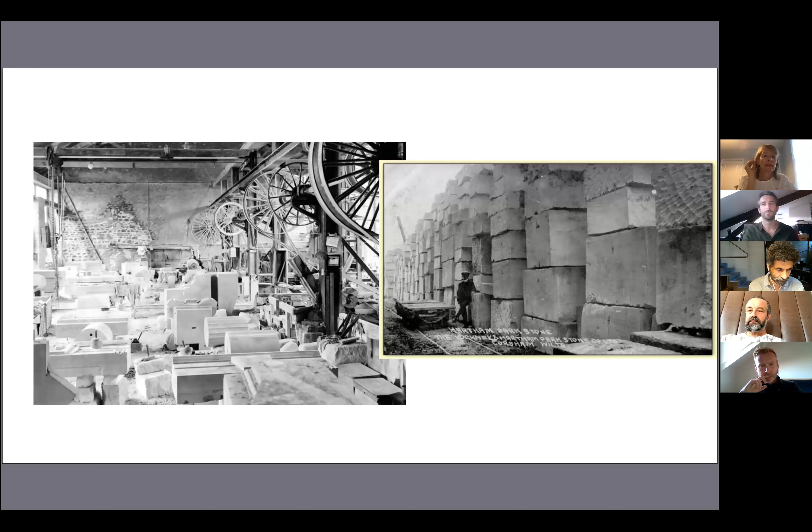Here you can see two pictures from the beginning of the 1900s, 1910. And you can see or imagine the numbers of stonemasons working with the new steam engine, working these huge quarries, open air quarries or underground quarries. And it was not a small industry. It was really a very big and thriving sector. So as you can see here, intricate decorative ornaments were just churning out from all these huge workshops. And I sometimes wonder why and how did we manage to lose the battle against the new material that was going to come.

As I say, people have got this sort of idea of quarries being still, maybe stone being hand cut and with hooks pulling the stone, and that's why it's so expensive. No, it's just that, oh, sorry, there are in fact two pictures of beautiful quarries. But anyway, here's two quarries.

But in fact, quarries are highly mechanized. Here you've got huge pieces of stone already square, ready for shipping to maybe one of Gilles Perraudin's projects or Carl's new venture in stone. So you see, it's got everything for it. It's easy to extract nowadays. We've got legislation to look after the way stone is being extracted. It's a serious and still very busy sector.

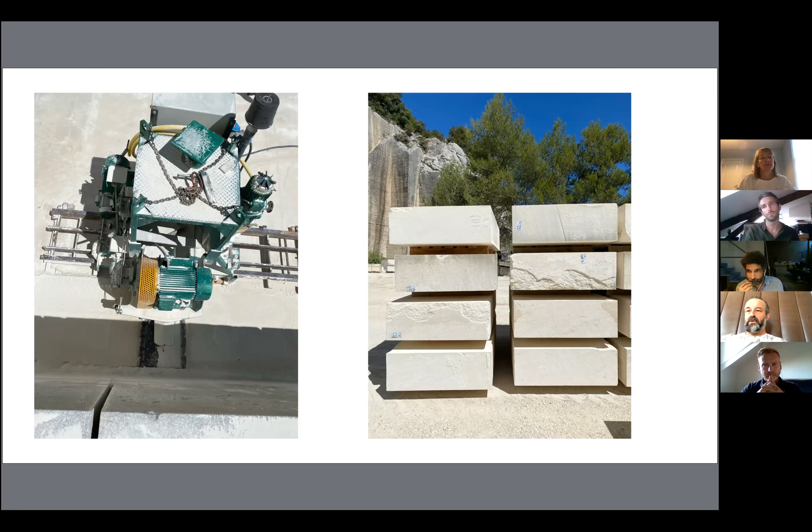As you can see, large machines in different quarries all around the world just safely extract stone. And you can see these massive blocks ready to be installed for a new build. So I think the beauty about stone is that you can not only extract it from the quarry, but you can recycle it as well. All around Rome, France, Spain, Greece, you can see incredible testaments of the use and reuse of stone.

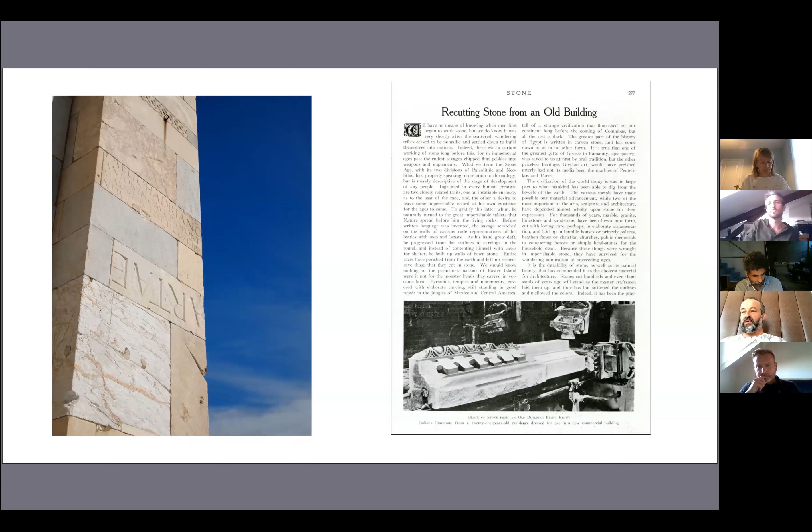So yes, as I was saying, how come suddenly stone became so irrelevant? Well, the very first thing is that with the advance of steel and concrete, stone started to be, because it was not man-made, seen as having a lack of control of quality. I think people started to say, well, at least with steel or concrete, we can monitor the strength, the rigidity of the material. And so little by little, like on the Flatiron here, you can see it's still self-load-bearing stone, but it doesn't support the structure. You've got a grid of metal behind that takes all the load. And as the steel was getting bigger, the stone was getting thinner.

And on Poultry Lane, the remarkable work of Mr. Stirling is an incredible testament to the PoMo movement and the cladding of structure just using thin stone. One of the biggest ones, for us in France, is Chemetov's incredible cladding of the Ministry of Finance in France. And you can see that in the 80s and 90s, stone became just a cladding material.

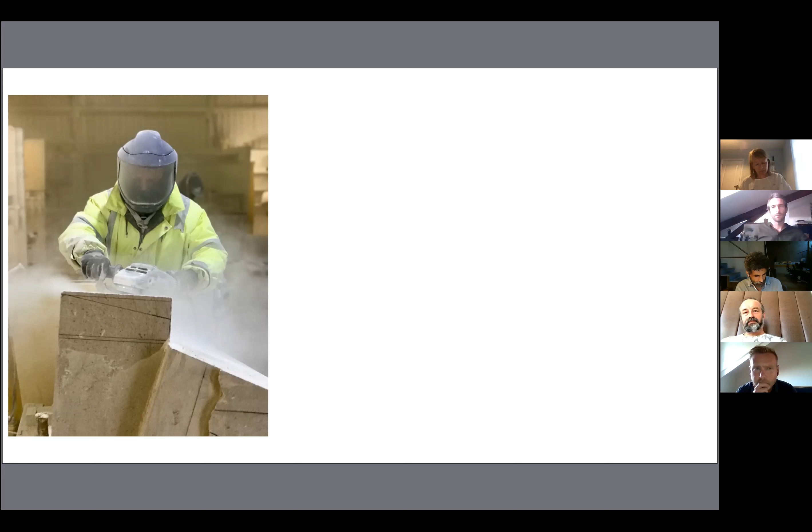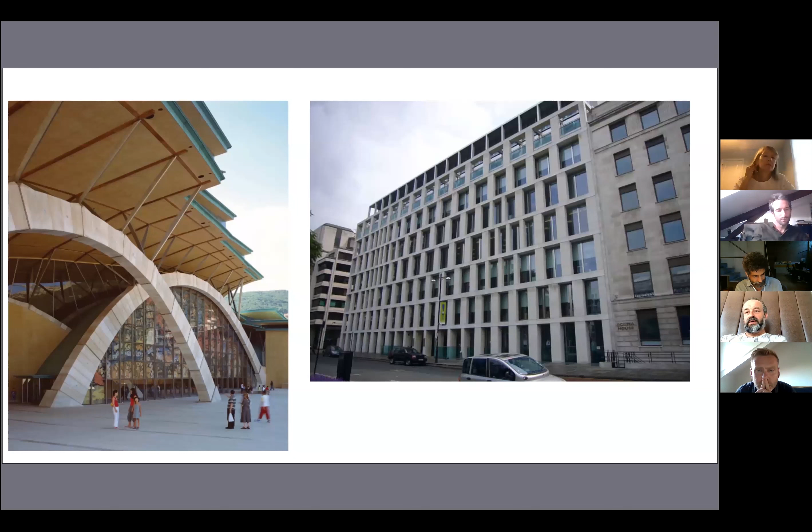Eric Parry has been using a lot of solid stone, just carrying on being true to the material. And I think it's a testament to some of the incredible work done by architects who truly believe in and are committed to building in stone. Building in stone means a good knowledge of geometry, a good knowledge of what we call in our trade stereotomy, the art of cutting volume, in Greek.

So as I said, this little group of stonemasons, we decided to inquire into the way that stone could be reused. As Valérie touched on a few minutes ago, there is an incredible lack of knowledge on how stone can react to different loading, stresses, and so on. And if we want to make it available again, we need to come to a sort of graded system, like it has been done in other natural materials like wood. And testing and torturing stone to some awful effect.

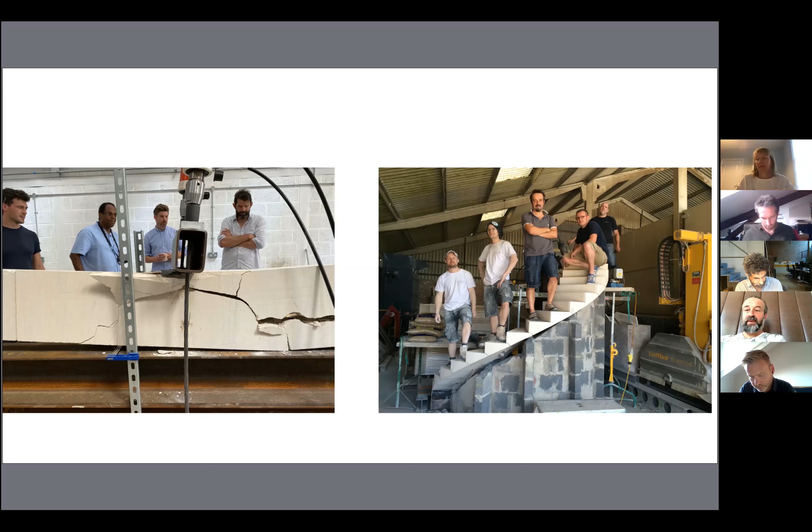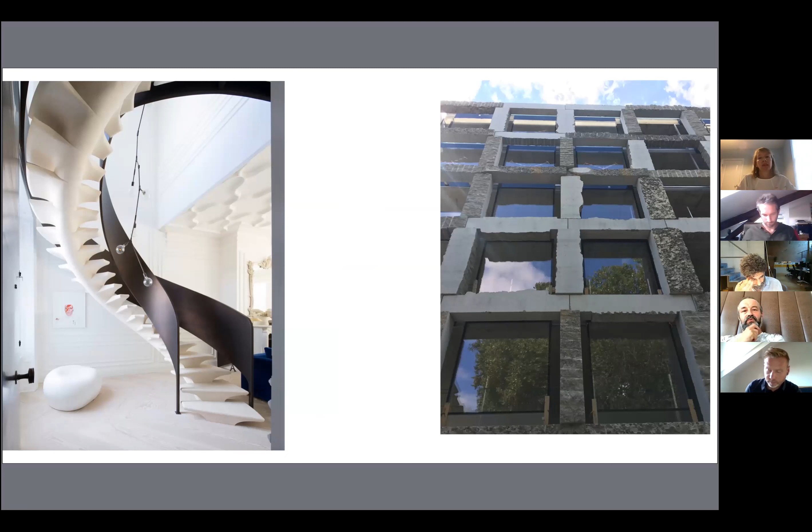And from 10 years ago, where we had this staircase with many cables going through and so on, we have reached now a level of stone art that can be used with our fantastic stone staircase here, with just a single cable going through the spine-like staircase. Another incredible work done with Webb Yates engineers for Undercover Architect.

The people listening to me, of course, will hear about the work by Amin at 15 Clerkenwell Close that we helped develop, supply and fit. An incredible adventure and such a pleasure to fit these raw blocks on top of each other.

So now, 10 years after this long path, we just think it's time, after the time of austerity of Fernand Pouillon, to use stone as just a simple material. I think it's time, looking at the past, at cities like Lyon, to realize that stone should go from being a material used for the luxury of people back to being a commodity. It should be widely used.

It should be democratized. That can only be done if quarries like Polycor, like plenty of other quarries in Europe, decide to put some skin in the game and decide to reuse stone as a load-bearing material, just to simplify the whole facade and building system.

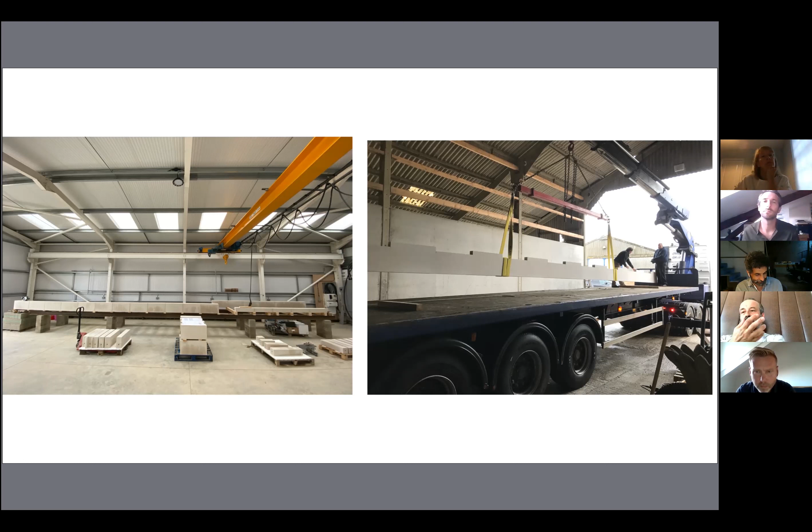If you were coming to the Stonemasonry Company now, you would see that we are starting our new chain of manufacturing to produce post-tensioned, reinforced or pre-tensioned stonework. We have got plenty of work coming our way where architects, designers, engineers start to say, well, you know, let's look at how we build. I think it's time to press the pause button and just reset a bit what we are doing. There is so much that can be done if architects, engineers, and craftsmen talk together.

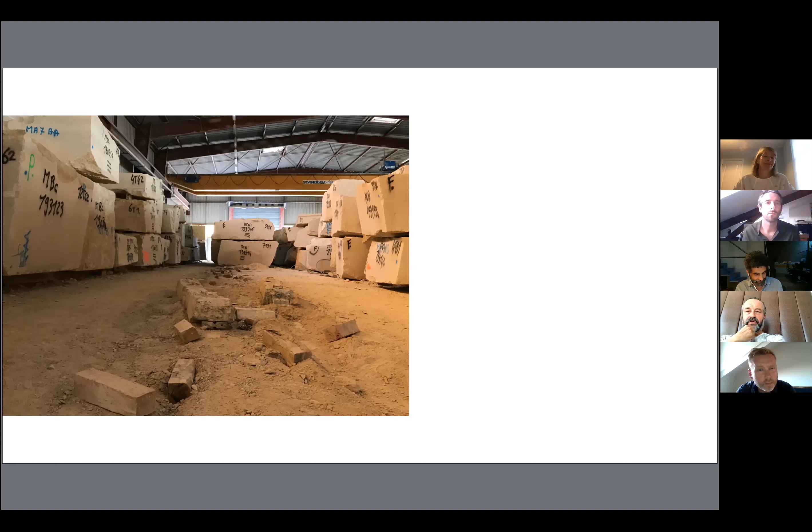Here, some incredible views of blocks waiting for you, architects, engineers, to come and choose your block to start to build a new architecture in stone. For us, it's simple. It's going to start with our office. That will be a full load-bearing stone structure, just to show that yes, you can build safely using stone straight from the ground, with very little manufacture on it, like Gilles Perraudin has been doing for the last 30 years.

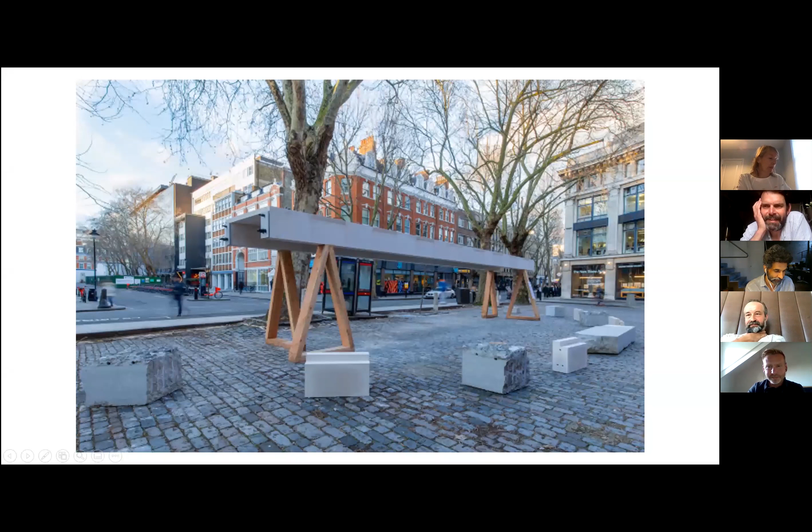Yes, I'm going to be much quicker than that. We can make all kinds of things out of stone. Some of the stairs and things that you've seen Pierre showing are quite adventurous structurally. The thing that was outside the building center on the screen is very simple to make: a pre-stressed stone beam, spanning quite a long way at a reasonable depth, reasonably simply.

I think it's clear to everybody that pulling stone out of quarries and using it consumes a lot less energy and CO2 than taking limestone out, crushing it, burning it, turning it into cement, and all the different processes that are involved in reinforced concrete. But people are often quite arrested by the assertion that stone is a sustainable material because they say, oh, it takes 25 million years to make. Who's going to make the new stone?

So yeah, clearly global volcanic stone production is, I can imagine, a massive amount of stone that's made every day. But what I wanted to say really was the ridiculous proportions, the smallness of what we build compared to geological volumes. We have an agenda to promote stone as an interesting new sustainable material, rediscovered from its past. People say, you're really advocating that we'll build everything out of stone in the future. And that's not particularly what I'm advocating personally, but I was kind of interested.

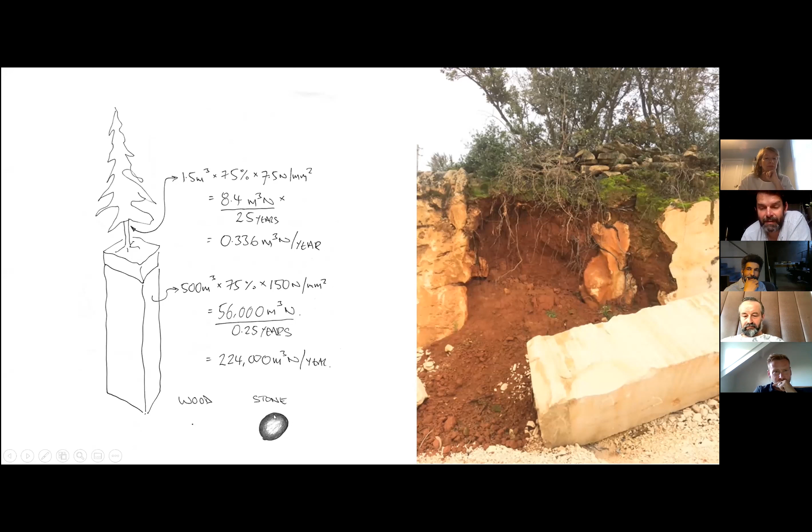Below the tree, the photograph on the right, 5 by 5 meters of limestone, 20 meters deep: 500 cubic meters, 75% recoverable, at 150 newtons, gives 224,000 cubic meter newtons per year. So down here is a little dot of the wood, and here's the stone yield that you get from the same land area.

If everyone in the world, and this isn't true obviously, had 5 by 5 meters of 200 millimeter thick concrete slab, 7 billion people, we would have 35 cubic kilometers of concrete or stone or whatever we choose to build out of. All of the buildings in the world, 25 square meters of slab for every single person, which they certainly don't have, would be a hole 42 by 42 kilometers by 20 meters deep, a speck, a total speck. So that's it. I thought I'd keep it short and succinct and focus on that.

Thanks, Steve. I think the beauty of the exhibition actually, and the whole sort of exercise in understanding the potential of stone, was seeing the stone canopy outside and seeing that sort of slab of stone and how that could be used in a way that I think made it very immediate for people to understand the sort of benefit of and the sustainability of using stone.

And I should say, for all of you that haven't realized, that it really was a holy trinity, curators, because I think the importance in the story is actually the kind of incredible work you can get when architect, engineer and craftsperson, the stonemason, work together. And I think that was a real success of the show.

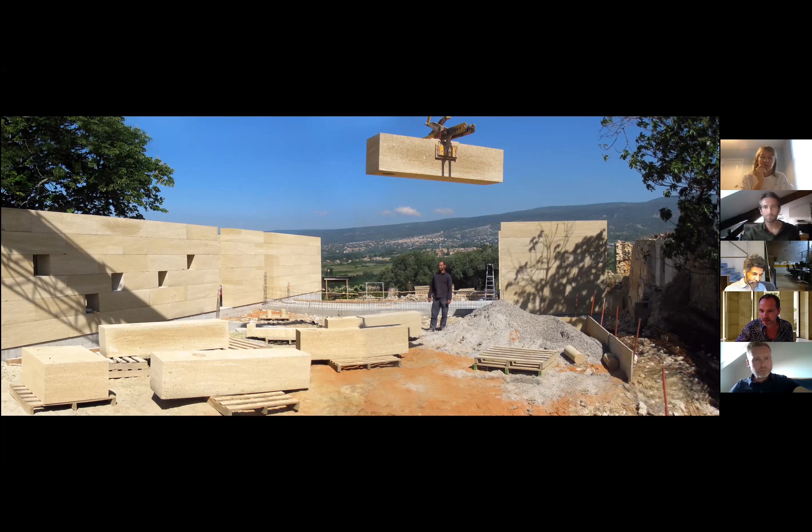And I had an experience when I was down there in the parking lots. There are lots of blocks of stone lying around. And I suddenly had this feeling that this amazing stone that came basically from Roman quarries was just lying around, and so obviously had to be probably pretty affordable and reasonable to use. Then I got a project to build a house in the Luberon Valley, which is a protected natural site, and where the building code is quite restrictive, and one had to make stone-colored buildings.

So after toying with colored concrete and other ideas, I sort of put these two thoughts together and realized, having also seen other architects building with stone, for example, Gilles and some of his work, although I'd never seen any of them personally, that it was possible. And it turned out also to be affordable, which is to most people quite surprising.

Basically, the first project was this idea that you just build like Lego. And you pile up the stone that comes in cubes, and you can move the stones a little bit, and you can create small windows and have a totally load-bearing building, which is incredibly adapted to the climate here, which is very hot.

I also had another personal reference for that, which was that my parents and grandparents before them have lived a lot in the south, and we always stayed in the guest house, which was a new building, supposedly insulated, and were dying of heat. And we would walk into the old building with 50-centimeter thick walls, which was lovely and cool, even when all the doors were open. So we figured we could do the same thing here and build this house, which is open to the landscape.

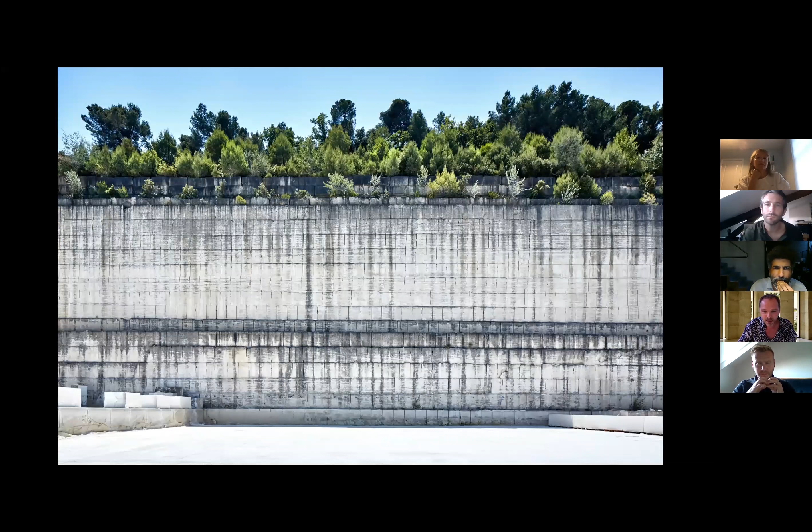So I also think it's important that you see the landscape from which the stone is coming. This is not the Pont du Gard quarry, which is basically a Roman era quarry. This is Estaillades in the Luberon Valley, but it's the same thing. The mountain has basically been slowly sawn down, taking up not too much earth, as Steve was saying.

We built this winery, which in a way for me was almost like moving a mountain. There's an unconscious link, which I only realized later, to that quarry. The blocks came out and we just piled them up, and that made a building. Of course, it's not that simple, a lot of thought went into it, but that's basically what's

going on here, where you have a building where the internal structure is in concrete for reasons tied more to the way the building was made and the wide spans, but the outside walls are load bearing. As you can see, when you see how the windows are made, it's just stones piled on top of each other, which are twisted.

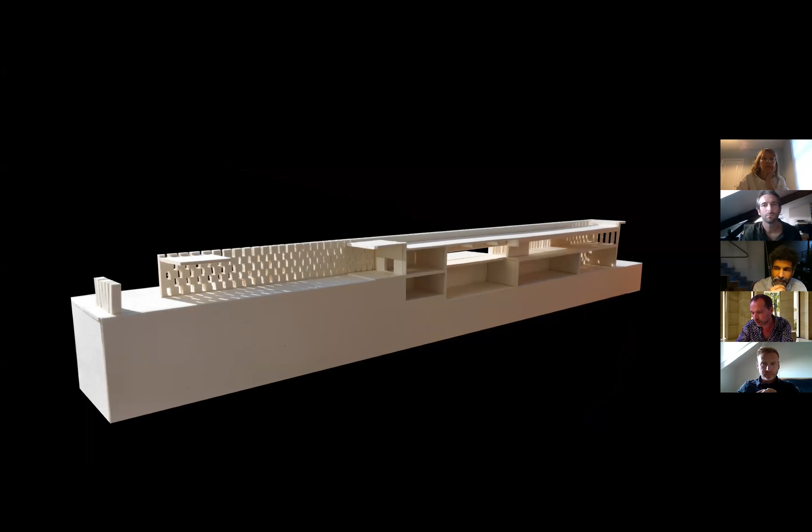And here you can see the length of that building, where all the stones are slightly twisted to give a sense of scale to this very big building in the landscape, which is partially buried to make a quality winery. Seen from the inside, from the left to the right, you have a protected, sort of screened off harvest courtyard where the grapes can come in, and then they will go down through gravity, making better wine as they go down the hill.

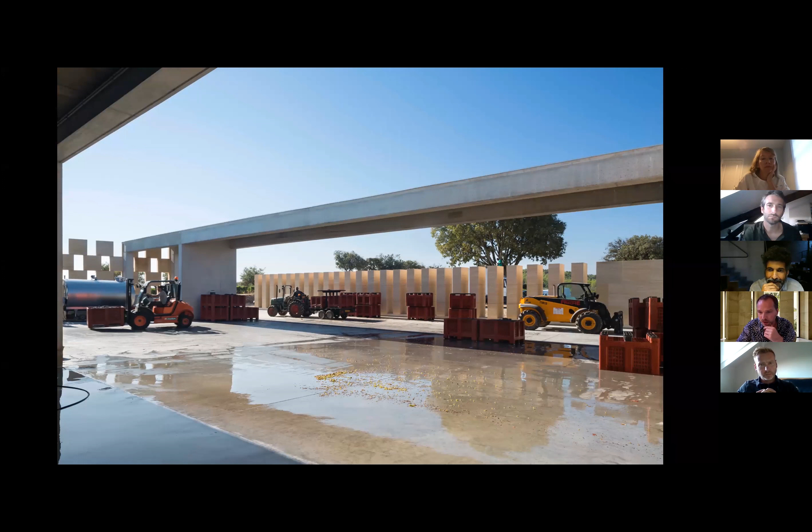And again, this is the inside, so you can see the windows are just put in between the blocks of the wall that have been twisted to make an opening. And yet it's also a very functional space. This is the courtyard. And because they have visitors, they don't want visitors to see all of what's going on, but you can still look in.

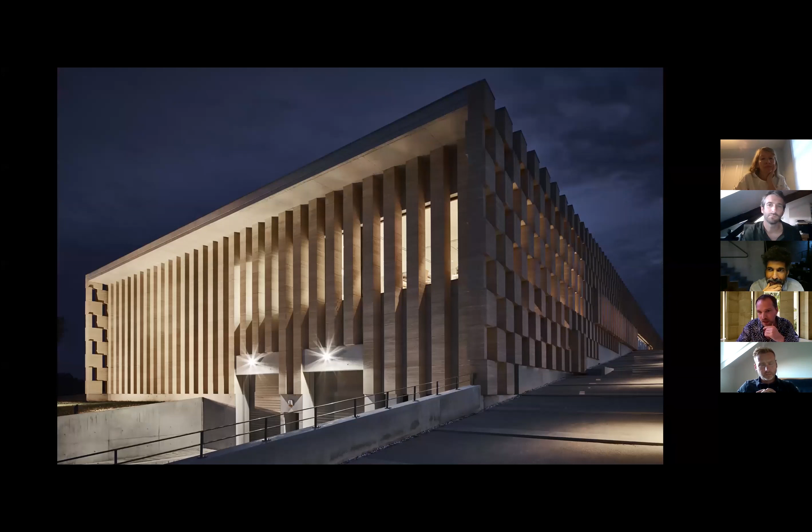And the building was also conceived as a series of screens to protect the inside, to keep it cool and to protect it from the direct sun. And I have to be honest, I hadn't thought about what happened at night when it becomes a lantern, which was kind of magic.

Again, back to the quarry. This is also the Estaillades quarry. And to give you a sense of scale, you can see in this opening, this is what they call the office, actually, which is a hole in the mountain. And you can see the 2.5 meter high grate down in the center there. So this is about a 20 meter high opening in the mountain. And these spaces are absolutely inspiring and very much tied to the kind of emotion that one hopes might come out of a building.

I'll now show you quickly Delas Frères, which is also very tied to the landscape, as the other project, which is called the Domaine Haute, was. This is the Rhone Valley, and there's this mountain which has a very favorably oriented hillside that's terraced for growing wine and makes some of the nicest wine in the Rhone Valley.

And down in the village by the river, the town of Tain-l'Hermitage, a little off to the right, so you can't actually see it, is the site where we built the Delas Frères winery, an existing site with a manor house that we renovated. It was quite an imposing and not very happy building, to be honest. And it had a nice garden, but that was very run down. So we renovated the garden.

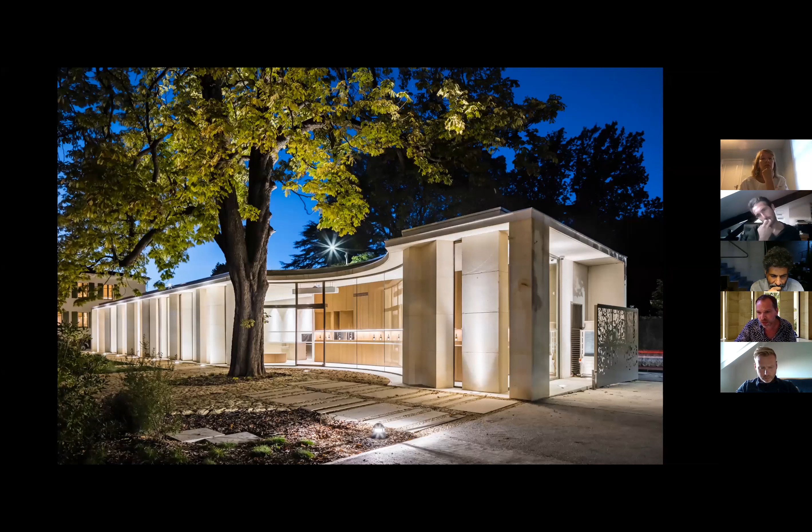And here on the street side, we thickened the wall on the street, as it were, to make another small building, which is the wine shop, which is also made using stone. This is not from the Estaillades quarry, which the winery is. This is actually from the Fontvieille quarry, which was kind of a wink to forebears in stone construction in France, notably Fernand Pouillon. It was the quarry that Pierre showed.

The winery is, again, wineries are very technical buildings. They're a little bit like somewhere between a museum and a factory for making wine.

And the visitor space, oh, sorry, I'll get to that. The visitor space is top lit with direct sunlight, and the wall that is curved is reflecting the light indirectly into the working part of the winery without getting any sunlight on the wine itself, which is really bad for wine. There should be no sun.

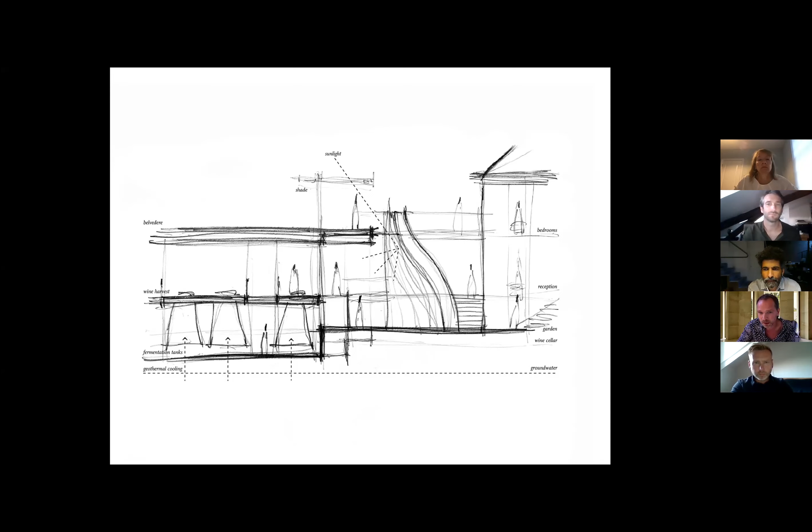What's interesting is we modeled the wall. We gave that model first to the engineers of Stonemasonry, who I should mention did a great job, and also to Olivier Chastel of Grain d'Orge, who cut the stone at his site, and we gave them our 3D model from the computer, which they then adjusted structurally and then used to carve each block.

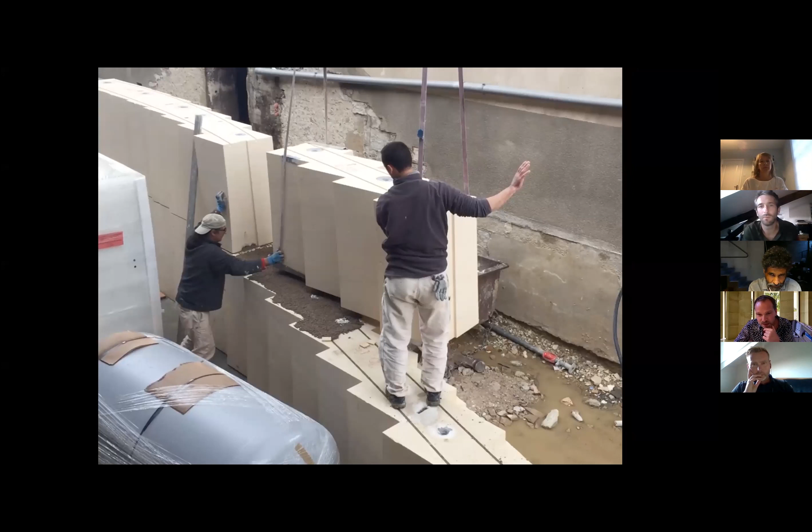But the final phase was just these two guys, father and son, Eric and Manu Chaud from Printemps de Pierre, who laid all the blocks, which is quite an amazing thing with an incredible precision. And I also show this picture so you can get an idea of what's going on, because as you may have seen in the section, this curving wall is actually freestanding. It's cantilevered from the ground, and it's tied together laterally, horizontally.

If you can see the grooves under his feet, there are cables, steel cables in there. And right behind where he's standing, there are holes, and those are the vertical post-stressing cables that will tie the blocks together down and anchor them to the foundations. Sorry, a little technical precision. And the result being this, which is a totally freestanding vertical wall. Its curving shape helps give it stability.

Thank you, Fredrik. I mean, beautiful projects, really. And I think what's really lovely is to see the stone in the landscape and realize how suited that material is to building in that landscape. And as you talked about the emotion, which maybe is something we'll pick up later when we have our brief discussion after the presentations. One of the other great things for me in this exhibition was finding out more about the contemporary practices working in stone. People whose work rightly deserves a wider audience. So it's great to be able to show your work, Fredrik, and also the work of Studiolada.

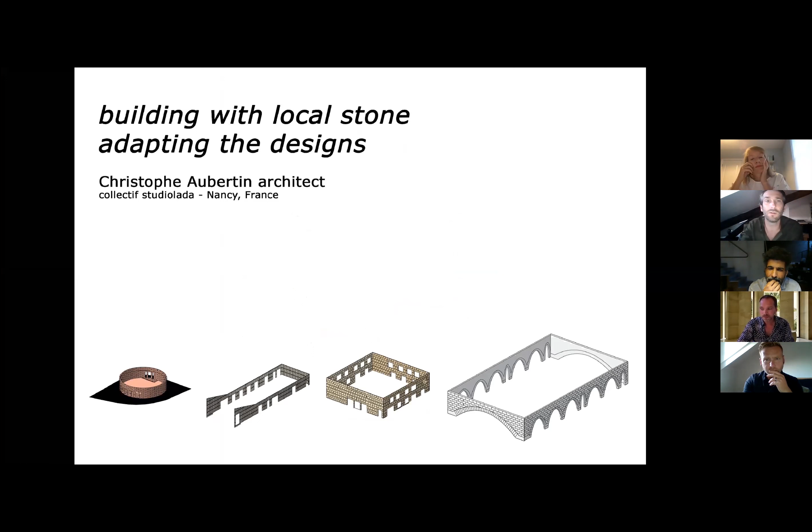Okay. So I'm going to talk about our practice. So I'm Christophe Aubertin from Studiolada. We are in France, in a quite small region in France. And the thematic is because we try to build with our local stone in the northeast of France and how to adapt the design with this stone. So this is a map of France with the different kinds of stone that you can get. And we are in this part.

So it is not like in the south, but we have stone anyway, and we have different kinds. We have limestone in this part, the white one, and also the yellow one in the north. And we also have sandstone and also granite. And we are interested in that because we think that if we use local stone, it is more sustainable, because there is less petrol consumption.

But also it's very interesting to find a new historical use of our resources in our area. So we think that we can invent a new architecture of each area according to the resources, material, but also the technical resources that we can find. So, for example, this is our area, and we have some buildings here in the area of the limestone. So we try to reduce the way from the quarry to the place where the building is.

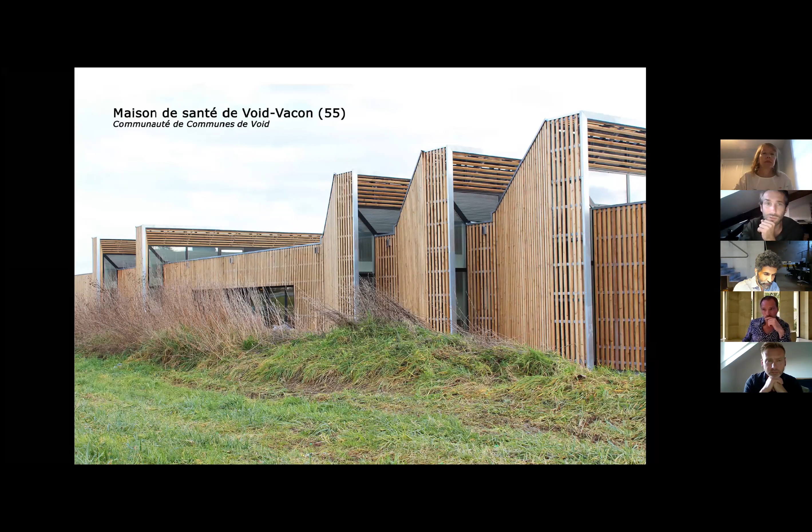So that was my first building. It was like 8 years ago. It is health offices, and for this one we built it in wood, and we were in a region of stone, so we wanted absolutely to use stone, a massive stone in it. So we just built this wall inside, that you can see, this inside wall in stone, and we had big beams in wood, crossing from this facade to this facade, and it is also on the wall here.

Please, sorry for my English, because I really don't speak good English. I try to do my best.

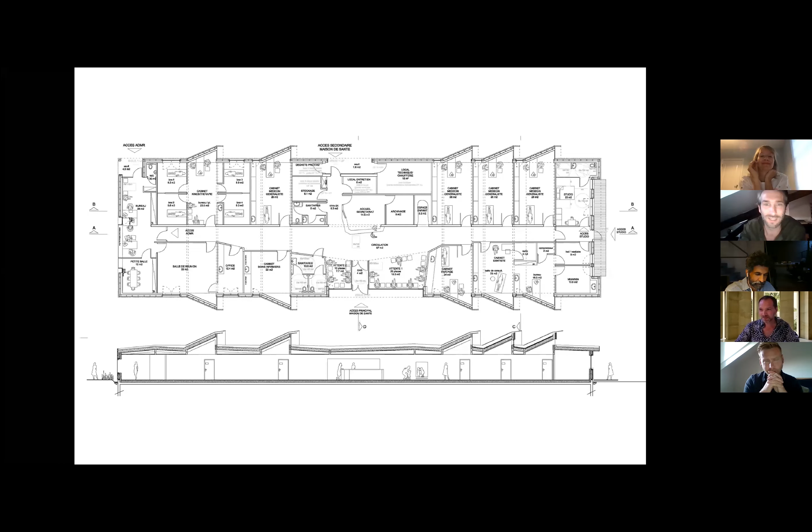So we wanted a big wall, but the best that we could do was a wall 22 centimeters wide, because of the quarry, because of the price, because of many things. So we built this wall inside like this, but we were quite happy to do it without concrete, without steel reinforcement in the stone, and it is only stone and then the wood beams that come on it. And we just have this in the floor.

It is to cut the cold, to stop the cold coming inside the building. You know, so this is cellular concrete. So we were quite happy to use it. And when it is inside, it's interesting because the wall can be visible on the two faces. And also, I don't have a nice picture, but we use stone on the floor, and for this we cannot use the local stone, but we use stone from Bourgogne, which is very hard and very cheap also, and this is adapted for the floor. And that's it. So that was our first building in stone.

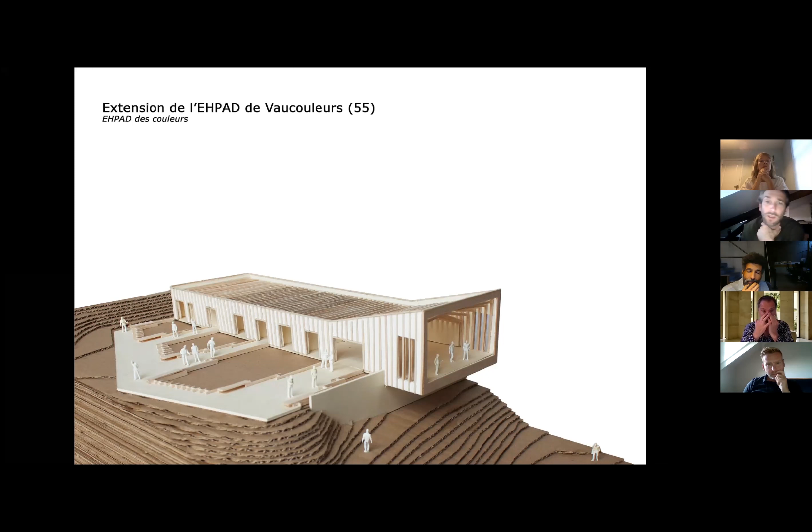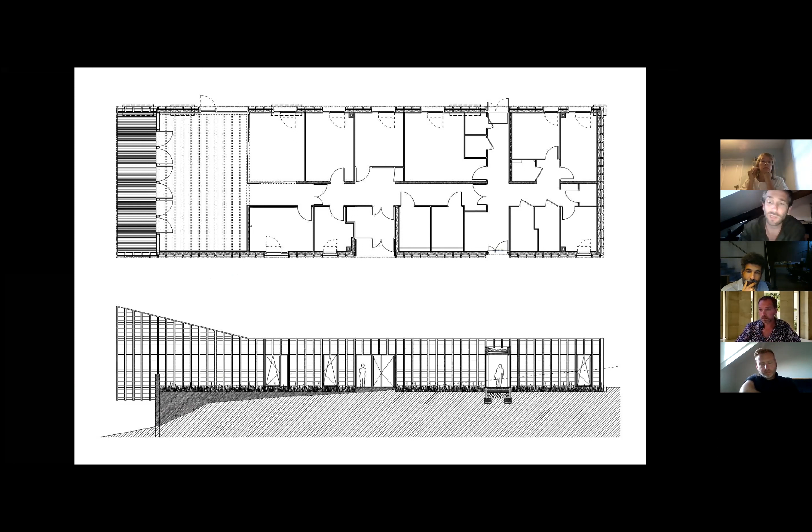And then some years after, we had a new building to do. It is a retirement house for retired people. And we wanted to use also the local products, so local wood and stone. But we wanted to do it the opposite way, so to get the wood inside and the stone outside. So also I have to say that the budget for this building is quite classical, and we have to find solutions for the economy.

And so we wanted to do a new way to use stone with a cladding. We wanted to make a cladding using wood pieces like this, and then we put a small slice of stone like this coming inside the wood pieces. So we build the traditional wooden structure that we call ossature bois in French. So it is like a balloon frame with a panel, and then outside, without basement, we can put these pieces of wood and then the stone. And so the way to put it is like this. So you can see the pieces of stone.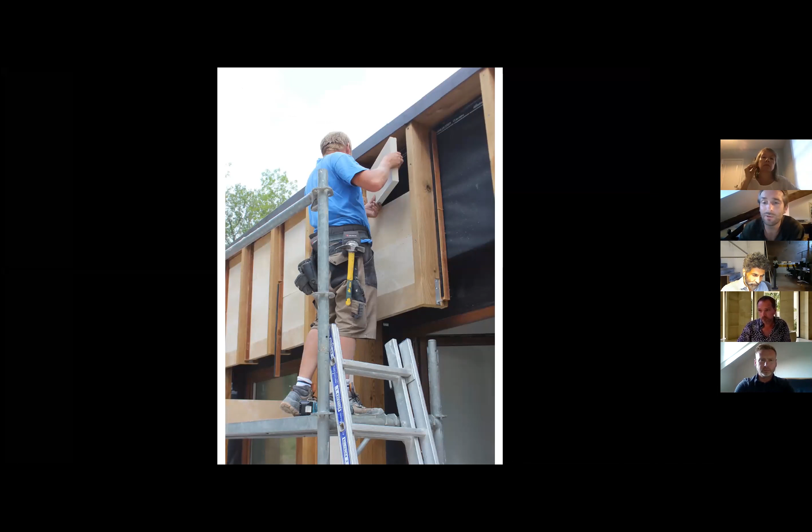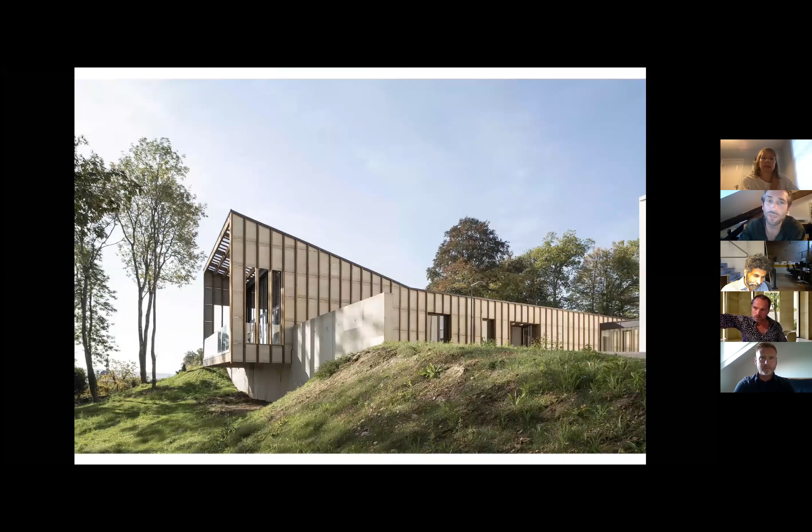It was quite difficult because this system doesn't exist, so we had to make a specific certification with the French government scientific center, and then we had to do many studies to prove that this system is okay. Because the main problem was that the wood moves, so you get some movement in the future, but the stone cannot move. So you have to put some plastic pieces so as not to break the stone when the wood moves a little bit.

So this is the system. So you can see also that there are two kinds of stone. So this one is from Bourgogne, and the other one is from Meuse, so very close to the building. We made some tests in the laboratory to see if the system is

efficient. But the problem was that this stone at the top and at the bottom always breaks, because it is not maintained like this one, which is maintained at the top and the bottom. So we tried many systems and it doesn't work. So we have to choose a better stone for this part.

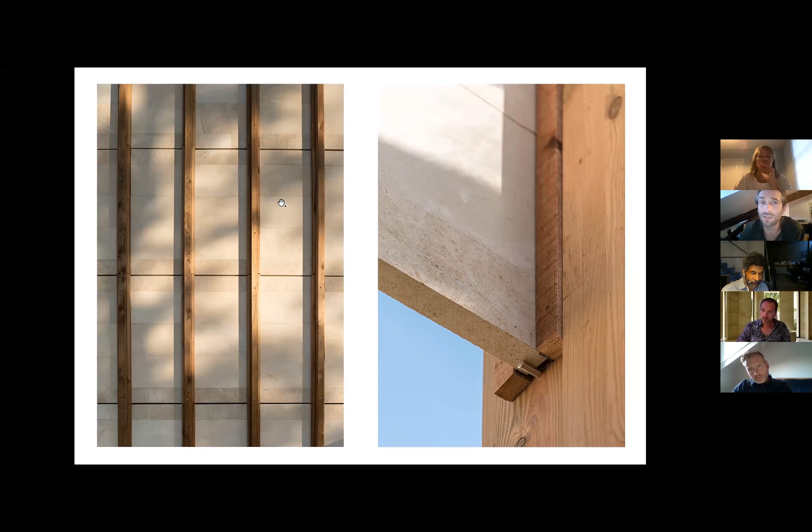Also, this system is quite economic, because a stone like this for the floor, a typical floor stone, is only like 50 euros per square meter. So you can buy stones at 50 euros per square meter, and after that, with the people that put it in the wall, the global price of this cladding was 150 euros per square meter, and that is quite economical. And we love this kind of design combining wood pieces and stone.

Then after that, we had a new building to design in Vosges. So this is the area where I come from, where I have all my family, and we know in this area all the churches, all the institutional buildings use mainly this stone. This stone is sandstone, pink sandstone, a classical stone, but we wanted to use it

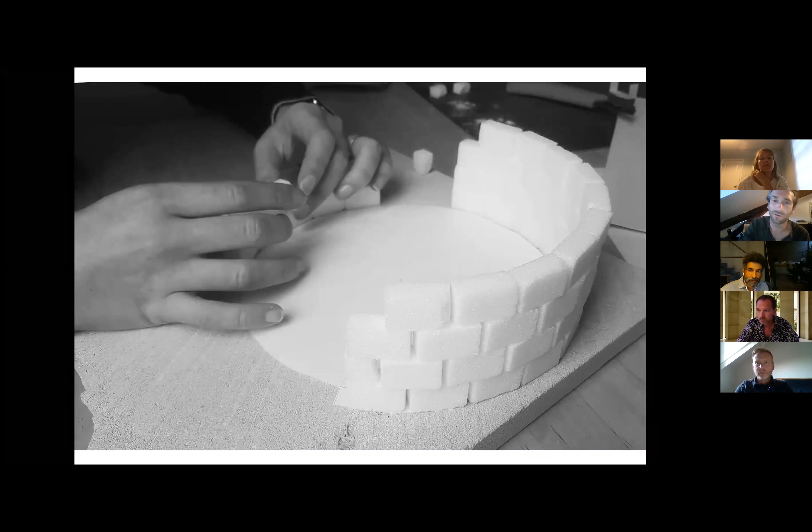in a contemporary design. So in the beginning we wanted a circular building because of the function of the building. It is tourist offices, and we tried this kind of design with the circle. In the beginning we went to meet the quarry close to here, and with them we chose the size of the block. So the block is 140 centimeters, and it is 35 by 35.

And then everything is really geometric. So we have 32 pieces of stone all around, and we have 10 blocks in the height. Everything inside is in wood and outside is in stone. Somebody talked about the seismic condition. This building is built in a seismic area. So the circle form was also a response to that, because the circle form is the most static and the strongest, because you have angles all around the building.

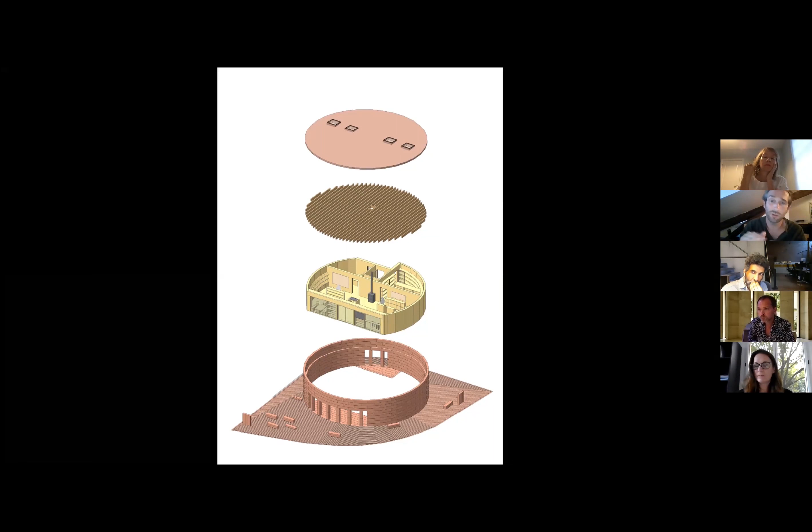So we just have 4 vertical reinforcements. We have one here, here and here, but also in the pillars. So all the pillars and the extremities of the walls get some steel reinforcement. For the vertical one, we have a 5 centimeter steel tube coming inside the stone, and for the horizontal one, we just have a flat grid of steel coming in the joint between the stones. So very economic for the horizontal one.

And that is the design, very simple. I think everybody understands. We just have 20 centimeters on the top, 35 here, so we can put the timber pieces, and then we put the stone block like this. And this is the very simple and geometric design of this building. So like this.

And the last one that I wanted to present is another building in the area of limestone. So this is a new market in an old city with a lot of historical buildings. There we wanted to use this stone, so we entered a competition for this one, and we presented this design using limestone from the area and wood. So it is all stone outside and wood inside.

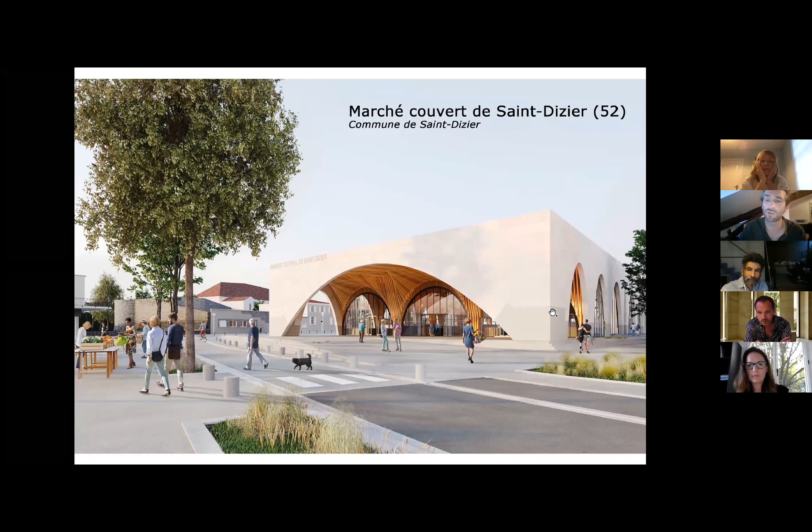And we were very excited, because I love the system of arch and vault. When I started to use stone, it was one of my goals, one of my dreams, to one day use stone in an arch. So when we got this competition, we thought it was the perfect condition to propose that. And so we proposed this design with a very big arch here, 24 meters. And inside, this is the wood structure. So it is also a geometrical design according to the arch.

And about the arch, we knew the Renzo Piano building, Padre Pio; Pierre talked about this one. So that was in our mind. And also we met a very interesting firm, SNBR, which is very close to the building site.

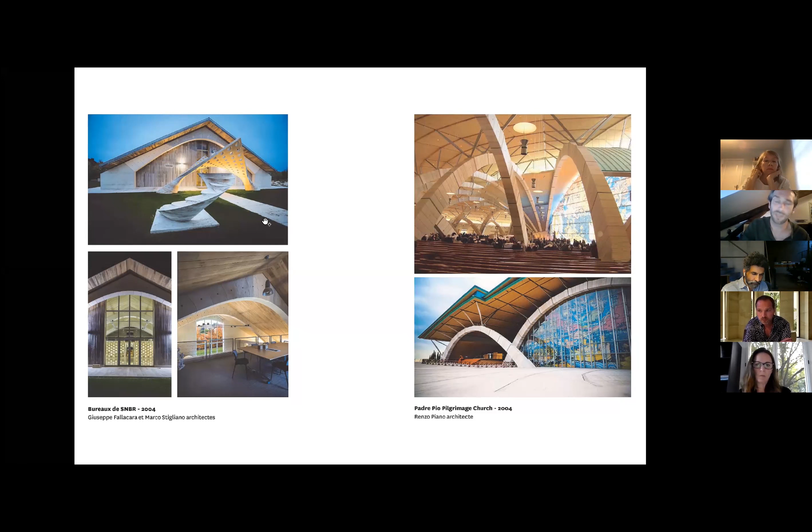We visited their firm, and in their building they built by themselves this very nice arch, which is like 15 meters crossing in this space, in this place. So we think that we can propose a big arch. There is at least one firm who is able to do it.

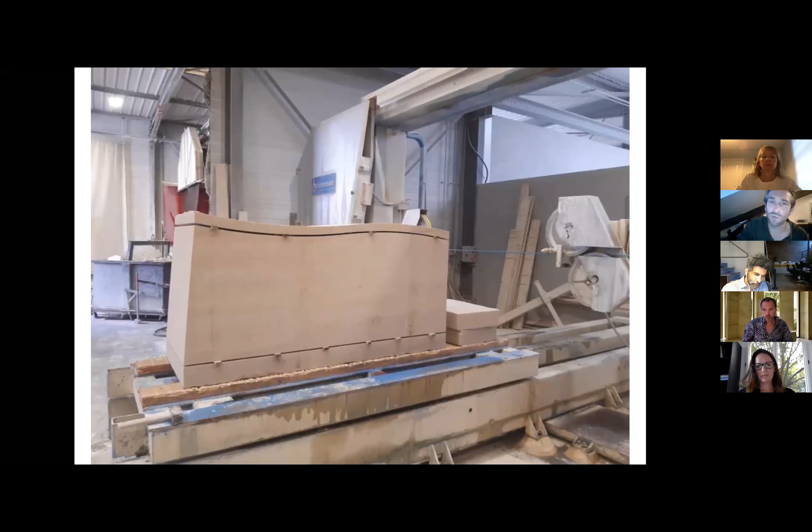And so we are starting the building, and now SNBR is starting to cut the pieces of stone. So you can see also these curved lines here. So these are small details to improve the friction between the blocks and to make it stronger. And also I have to say that we don't have steel inside this arch. We really use the traditional arch with compression.

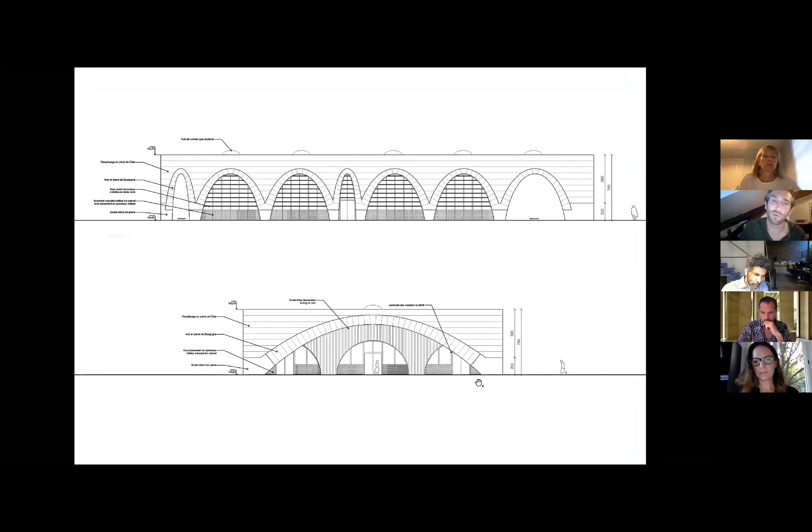We made a lot of studies to prove that we don't have to use steel inside. So this is with no steel, but we have a very technical steel here. This is the Freyssinet system. Freyssinet is an engineering firm in France, and they have a system with a cable which is really strong. So we have this system in the ground. So that is my last picture. So this is the end of my presentation.

Thank you. Thank you, Christophe. Yes. Really, really beautiful work. And I think we've heard so much about the incredible properties of stone and the economy of working in stone. Perhaps if you unshare, Christophe, I can ask you and Fredrik some questions about working with clients and then working with stone. So Christophe, because you're still there, thank you for the presentation.

Are your clients very open to working in stone? Is it a material that you have to explain, or did you find that the clients of these great buildings were very up for your stone structures? Actually, everybody loves stone. Maybe it depends on the kind of stone. I try to use granite because I was in an area of granite, and this stone is quite difficult to use because there is this association with the tomb, the grave. So granite is quite hard to build with, but the other stone, everybody loves it.